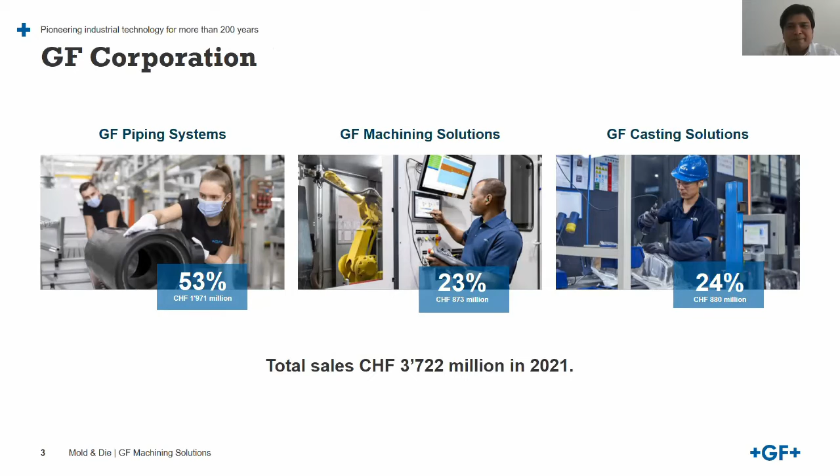More about GF Machining Solutions: currently we are headquartered in Switzerland, in Biel, and employ around 3,000 employees all around the world. Production facilities range across Europe and China, and we have 33 sales companies catering to the needs of individual regions and countries around the world.

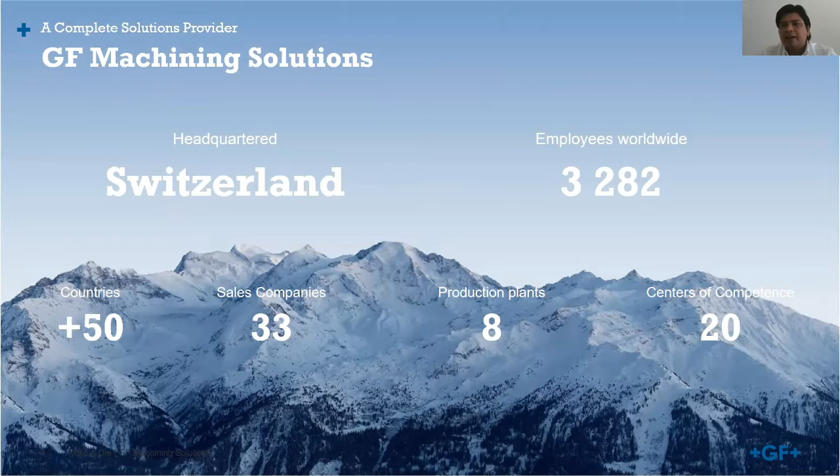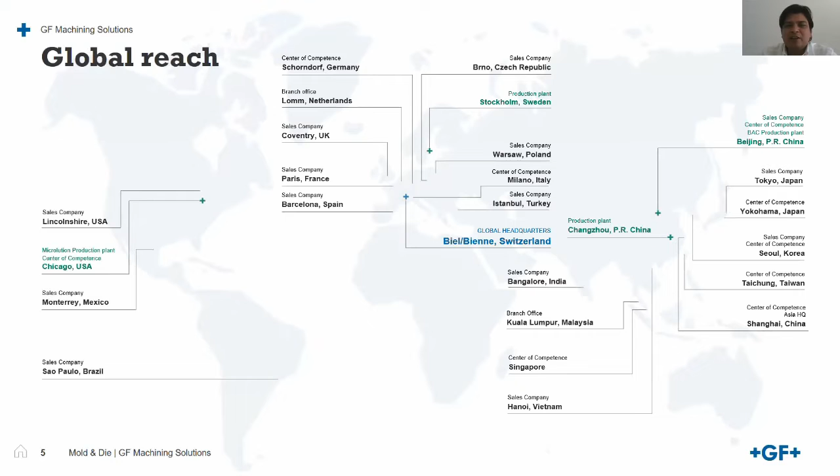If we briefly look at this, these are the competence centers, headquarters, and production areas available all around the world. We care about everyone around the world, mold makers, part manufacturers in many segments, supporting the manufacturing industry. We also have a long list of partnerships with research organizations to help us develop new solutions and innovations, continuously making progress on the machining and machine technology side.

Today, we have a portfolio of around 8 different technologies. Obviously the milling solutions, which include high speed, high performance machines, and also for aerospace, engine plus specialized dedicated machines. Then we have EDM machines, where we have die sinking erosion, then wire EDM, and also drill EDM.

Laser, which is fairly new, is laser ablation, including texturing, structuring, and a different range of laser sources. Additive manufacturing: we have a partnership with 3D Systems to provide metal additive manufacturing solutions to industries at the moment. In micro machining, we have a small unique technology with Microlution, based in Chicago, which is used to create fine holes and small metal machining for various aerospace or electronic industries. Then we have our own spindle technology, the Step-Tec high-speed spindle.

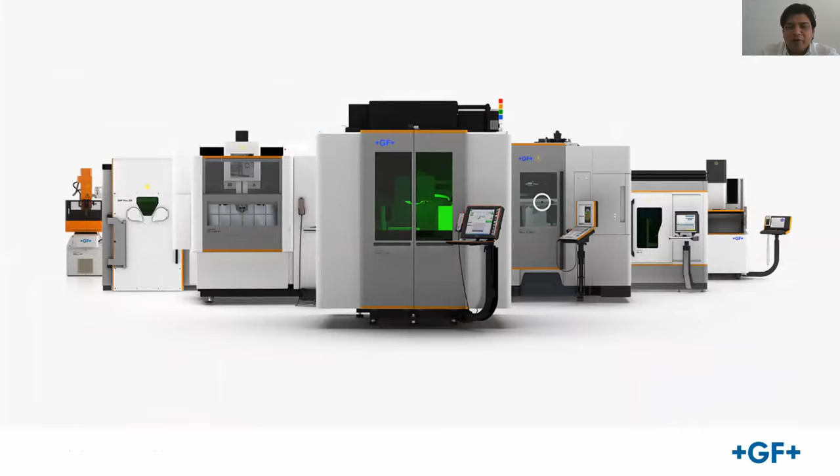So now we come down to discussing the topic of today: how we can support this using our technology. First, a brief look at the unique portfolio of our technology in combination with milling, die sinking, laser, and EDM.

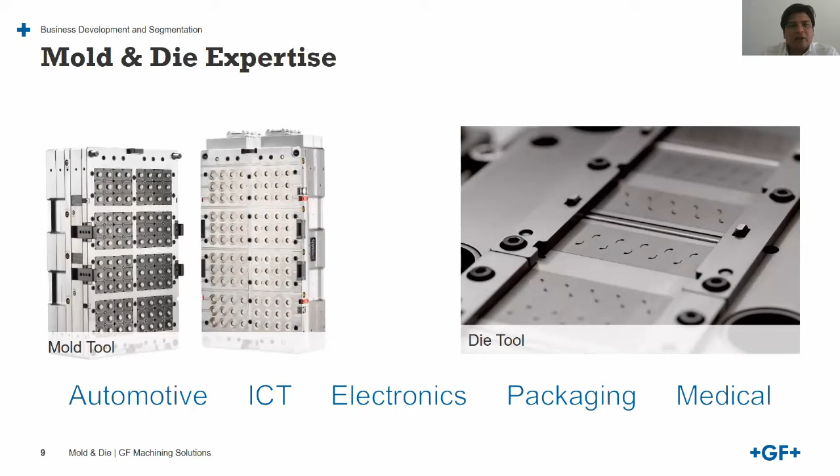This is mainly to increase our expertise in offering solutions for mold and die. Today, our focus is mainly in 5 segments: automotive, ICT, electronics, packaging, and medical mold and die industry, to create plastic components and create efficiency with the die tool in electronics or automotive for EV. So we have a large customer base who use our technologies in the mold and die industry.

So coming to innovation and trends, we started to see how we can explain the impact of the mold and die industry. Today, mainly what we see in the end is OEM consumer products, so we started from there. We have some products which we are offering or working with mold makers and OEM, and what we see in the market. A selection of these products we will briefly go through to understand how they are impacting, and what are the changes in OEM and consumer applications which are important for us as partners in the mold and die industry to understand.

First, this is just a small bottle of plastic. Now usually in a plastic bottle you have a certain amount of plastic used, even in the ones which are non-reusable. So you drink the water and you throw the bottle. It involves PET. This is a new product created by Nestle, which has an aluminum casing, and the internal part, made with the PET mold, is produced using 40% less plastic. So now, by using this product, you already add to the value chain by reducing the amount of plastic you use and you recycle.

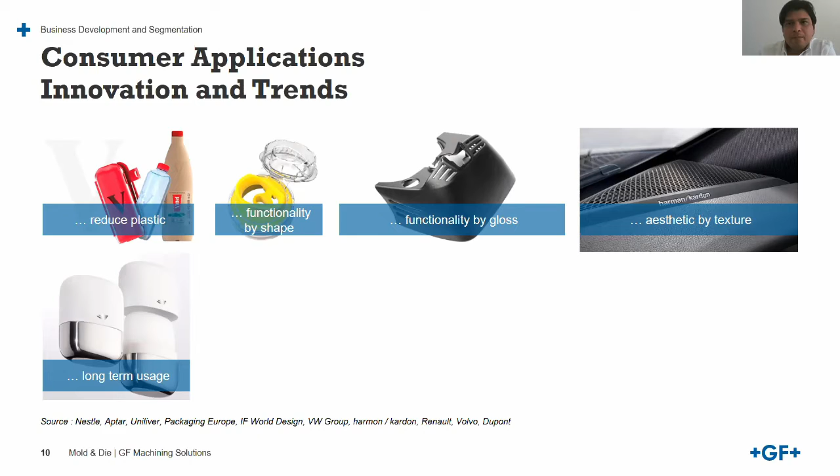Is it okay? I think so. You can move on.

By using a particular plastic which can last for a long term, you improve the product so it can be used in a reusable way for a longer lifetime. This automatically reduces plastic consumption because now you don't have to buy one plastic after another, but you can reuse a harder plastic that lasts longer and use it in a reusable way.

Another example is where we collaborated with the company DuPont. They were testing for chemical packaging and storage. Glass is a good material because it is chemically inert. With DuPont, they developed a particular plastic which has the same likeness in terms of texture and feel to glass, but it is not glass, it is a plastic. This was mainly developed to store chemicals and for the perfume industry.

We developed this mainly with sustainability as the goal, in the sense that the processing chain of glass is not as sustainable. Glass itself is sustainable, but the processing chain is not. So to remove that part from the value cycle of the product, they developed a special plastic which can be reused to replicate the glass-like effect and also hold all the chemicals, which has potential in the wine industry and pharma industry along with the perfume industry.

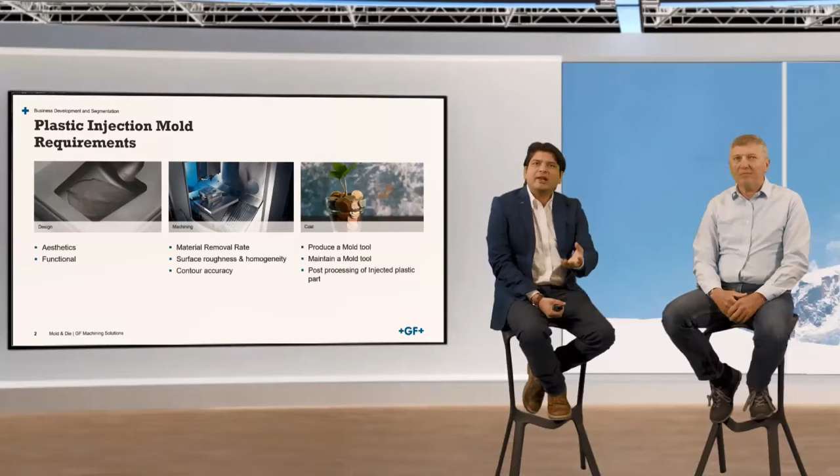As we discussed in the morning, there are sustainability aspects, new plastics to be injected, and new values to be created through the mold and then injecting the plastic. All these trends can be summarized from the mold manufacturing point of view in three pillars, which we are trying to address through our solutions. So today our discussion will focus on 5-axis milling and laser technology, both 5-axis.

Before we move forward, let's watch a short video introducing our product, a 5-axis laser texturing machine.

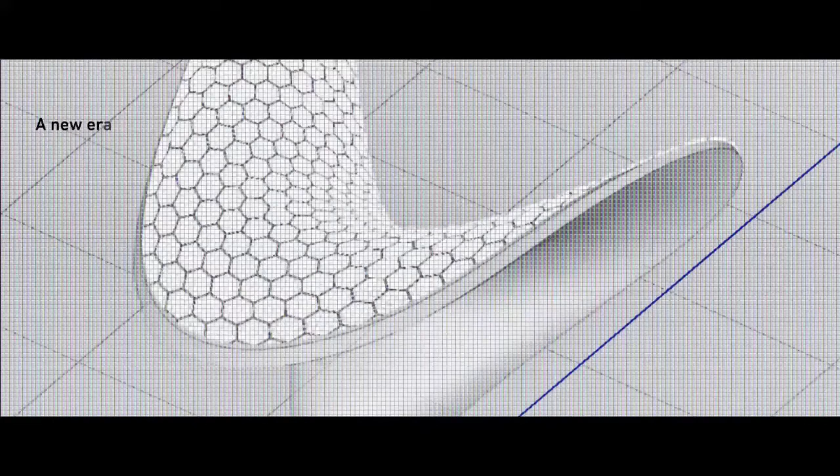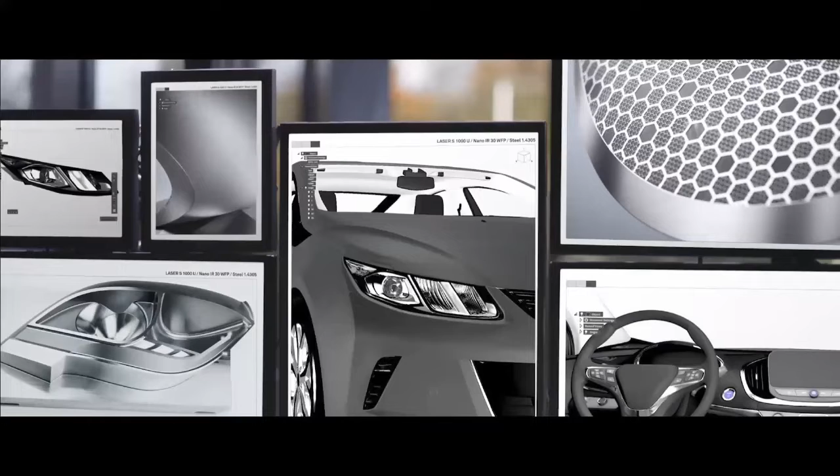Every step, every breath, every moment matters. Every second counts in the search for inspiration to capture the perfect form. We're with you, embarking on a new era in manufacturing. With our Laser S manufacturing solution, the versatile machining system enables new ways of working to answer the toughest texturing challenges. With a high-speed 3D scanning system and wider marking field, you can create even more.

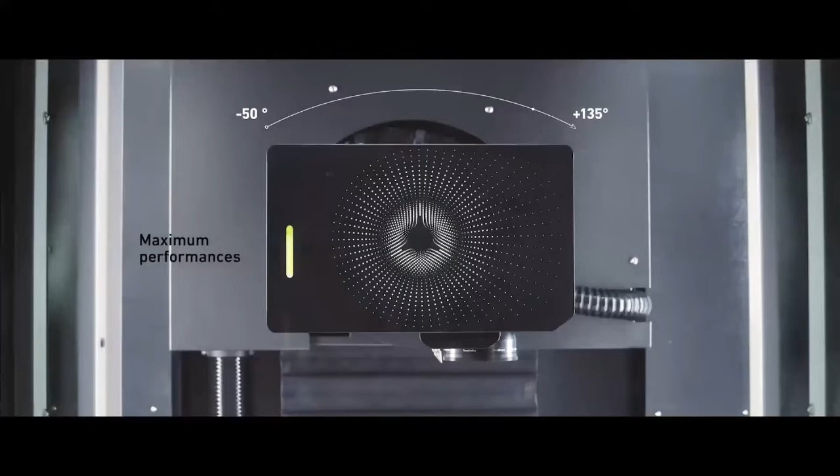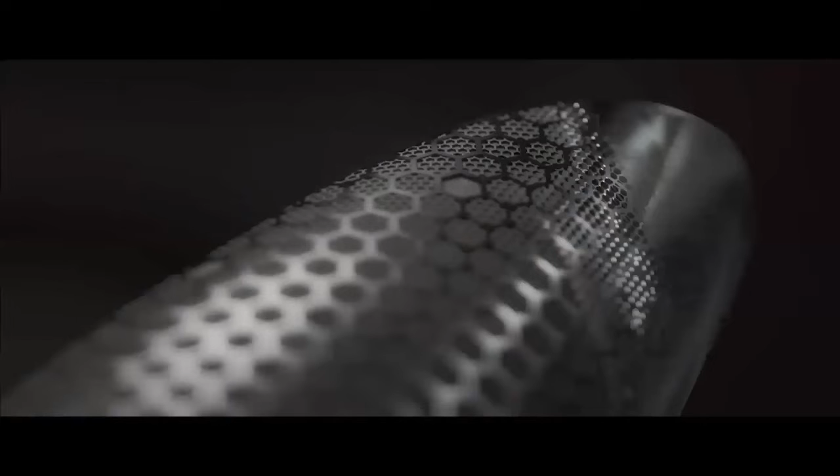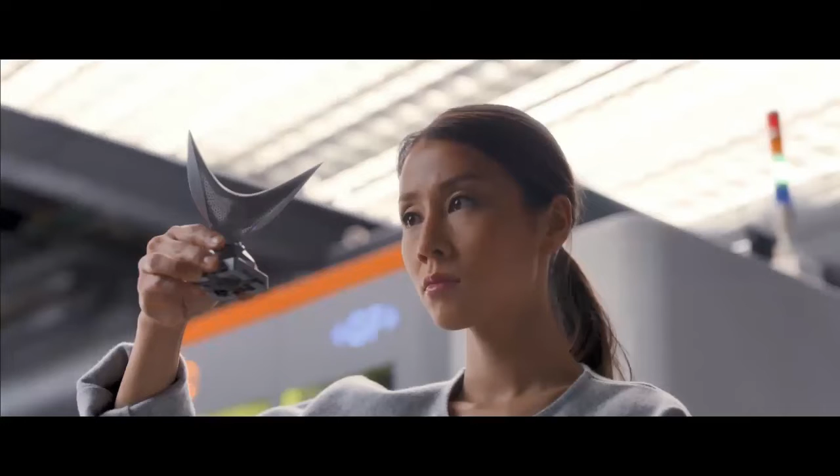SmartPatch technology optimizes your work for maximum performance. The soul of the machine, a unique laser head to achieve immense complexity. Moving fast to a simplified manufacturing process. You're always connected. And with expertise available from our academy, you'll accomplish even the most challenging projects, enabling the execution of the most complex parts while the finest grains are achieved, giving you the power to turn inspiration into perfectly designed, flawlessly produced reality. Laser S. Innovative texturing. Accelerated productivity.

Okay, so great introduction to the Laser S series.

How could a 5-axis laser technology machine be used to address some of the challenges mold makers are facing today? Basically every part able to be milled in 5-axis, where we can access with the laser beam - but the laser beam is smaller in size and longer in length compared to a milling tool.

Usually every kind of part you are able to mill, we can engrave or texture. This means we are addressing complex 3D cavities for sure. Also regarding design itself, the scheme of the part could be whatever you want - it comes from the design studio, the product designers with ideas, and then we try to apply it on the mold in negative to get the final piece.

The very important point in mold requirement is especially repeatability, for different molds made in different parts of the world, or several cavities made into a multi-cavity mold. And then process simplification - this is every time, every visit we have with customers, a deep request to cut down the cost and to simplify the process.

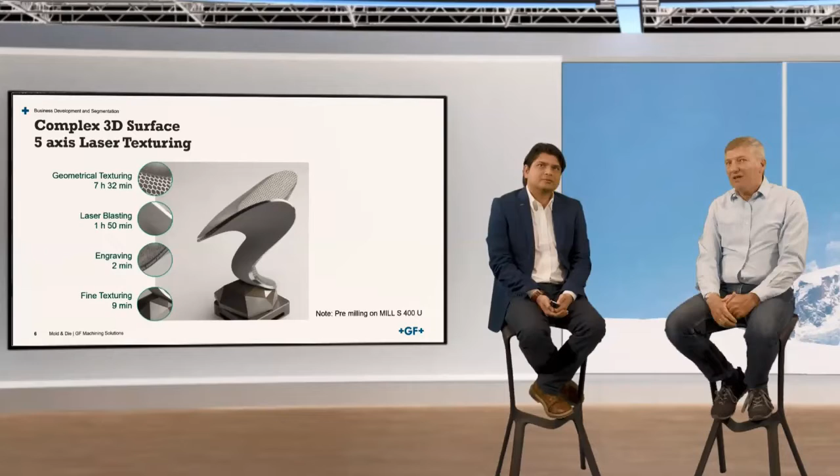On that part we applied 4 different types of texture: the honeycomb you have seen before; we also developed a specific strategy of laser blasting to do a kind of sandblasting, to replace sandblasting, but also to do some EDM VDI replication; engraving, for sure, on the border of this shape there is a sentence written; and on the bottom of this texture there are 2 materials - the wings are made of aluminum, and the pedestal is made of steel. We also applied some very fine texture - this is a brush pattern texture.

So as I understand, we are able to do all this in a single setup on the same machine. Absolutely, absolutely - and also moving from one machine to another through automation or not, through the System 3R tooling. So if I have one machine, I am able to do a lot of things, a lot of textures, and address most of my mold making and surface preparation requirements through this technology.

Absolutely. Most of the requests from mold making are not only texturing the surface - there are also some grooves to make from time to time, or some logos for the brand, or to engrave the part number or cavity number. All these things could be done on the same machine with the same laser and with the same setup.

Okay, so this is good. Let's see what else our laser machine can do. It looks promising for now.

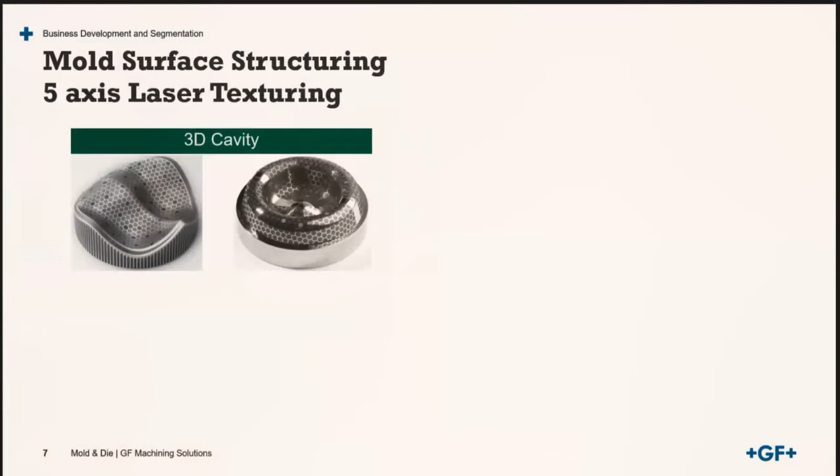Yeah, but still, we can see there the 3D cavities - all of them have been done either by turning or by high-speed milling here, and we need the shape of the part done. The laser will not remove a very high volume of material - this is not the topic, and this is not the performance of the laser. We are talking about the skin of the surface. So the good thing is you still need a milling machine along with the laser machine - to a mold maker, for sure, without a milling machine it would be a bit tough.

One more thing I have in mind - some customers, when they see this part, ask about stitching lines, because they have seen these kinds of issues when doing texturing with etching or other technologies. First of all, we have been developing this software for laser texturing 5-axis since 2000, 22 years ago, and with continuous improvement we are releasing at least 1 to 2 improvements of the laser with new functionalities on the software every year.

And then we are managing these patch lines through the strategies, especially the one you see on that screen with the honeycomb shape.

We use this Smarpatch texturing to cut down the patch, or the design, when it's not necessary. And this is patented - our own patented technology. Smarpatch is the name.

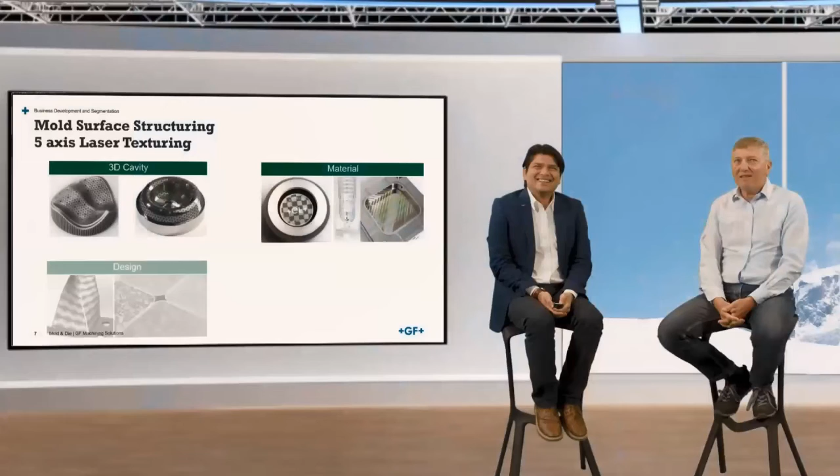Design-wise, I would say it's limitless possibility, because everything we can design, we try, and we've developed the tool to apply that on a 3D model. Could be for aesthetical purposes or for functional ones. We are really well introduced in automotive lighting parts, and this is not aesthetic - or it could be aesthetic, but it's also functional for diffraction of the light, especially.

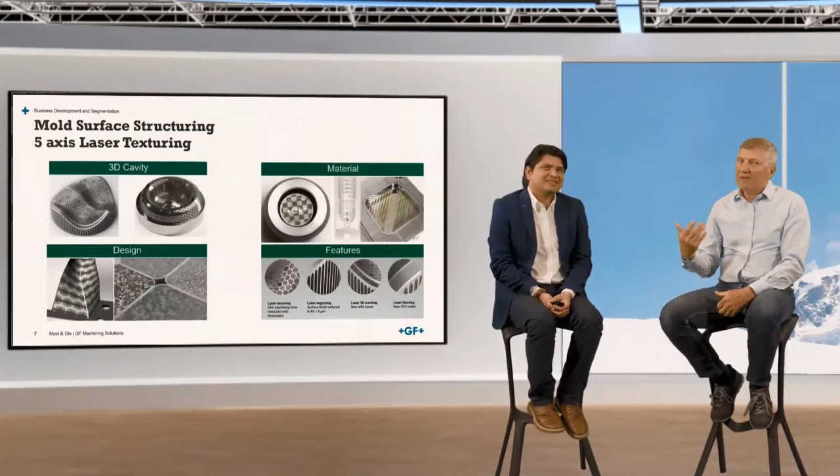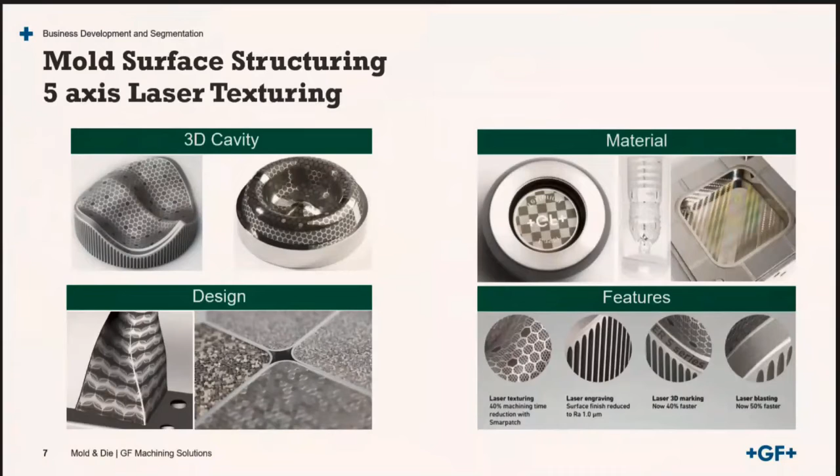So what about the features? We see a lot of things that can be done. Typically on the software delivered with the machine, we do laser texturing - meaning texture the surface, as we've seen with the honeycomb. We can also do laser blasting, which is a specific texture. We can do laser engraving to do grooves, like you see on the second bubble, but also light engraving or marking, and fine texture. Everything is a combination of texture coming from a bitmap file, from Photoshop for example, combined with the surface of the mold or the part.

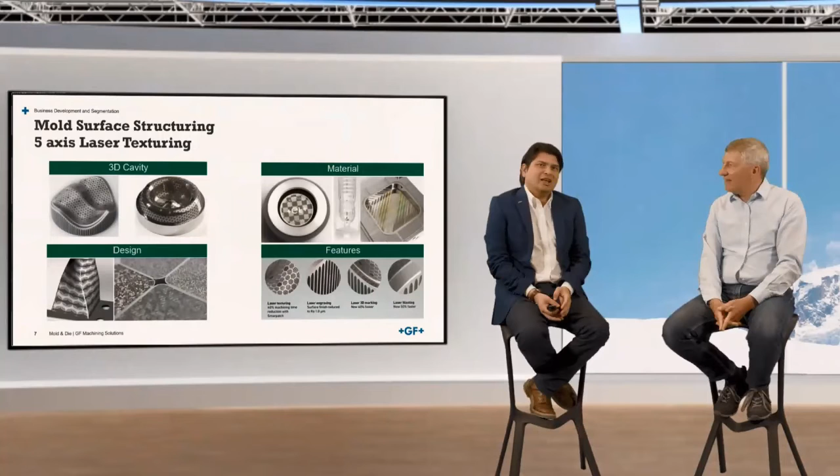Before we move forward, just one more question: if I have a texture, I can do this with this laser machine, but I can also do it with other laser machines, from laser S to laser P to femto, or I can do the same texture with the next generation machine down the line after 5 years.

We are developing the strategies for the new development we have done. If we compare laser P, which is a 2-axis scanner, with laser S, which is a 3-axis scanner, both will do the job, but quality-wise and machining time-wise there will be a big difference, depending on the shape and the texture. Time saving of 2 to 3 times using laser S compared to laser P. But not every part or shape needs a laser S - if it's flat, you don't need it. Then for the femto, this is different - mainly for micro engraving, micro machining, more requested in mold making, but more for lighting and packaging, because we can do very nice texture without burrs, without very sharp textures. This is one of the purposes.

Yes, Bob, I think you had some comment, but you are on mute. I think it's probably better we just carry on straight through. We carry on? Yeah, okay good. So if you have a break already, bring your coffee back.

Okay, so we got a very nice introduction on laser. Now we will move forward to 3 simple applications: PET blow mold, rigid plastic injection mold, and a forming mold.

We specifically choose 3 applications which you can see around the house, and we are trying to speak to mold makers and show the value we can add with our solution, even on simple molds. If we can add value here, obviously if you are doing a complex automotive lighting mold, there will be a definite 3-5 times value with the same solution.

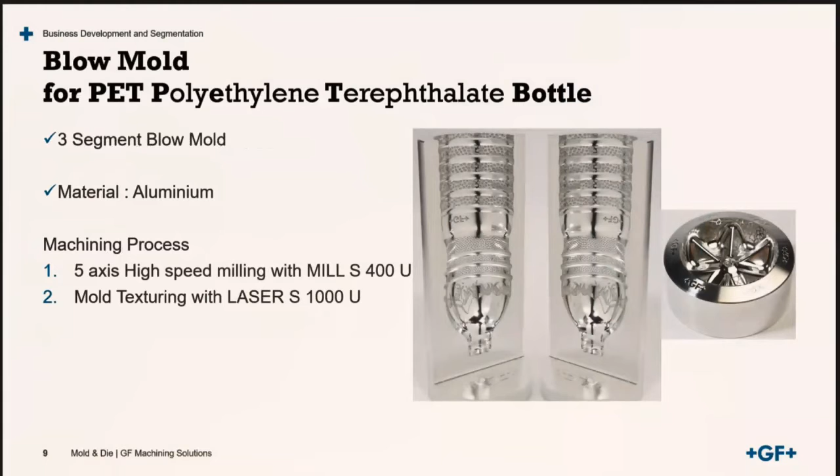Absolutely. So to start with, let's start with the first application, which is a PET blow mold. As we know, it's a 3-segment mold, usually made in aluminium. We apply our process of pre-milling and machining the cavity in a 5-axis milling machine with the mill S400U, and then we use the milled part with our laser machine to see how we can address all the texturing and engraving requirements on this mold.

So to begin with, we have the first kind of application description, I would say.

We did the blow mold in 5-axis milling, as you can see here. We arrived at a machining time of 6 hours 32 minutes for the larger part, with a surface finish of RA 0.03 microns. Wow, so it's already close to polished surface. That means in milling we are able to achieve polish-level surface to avoid manual polishing, which is especially in mold making usually a bottleneck. Yes, wow. So ideally, in this case, we can save up to 8 hours of polishing time.

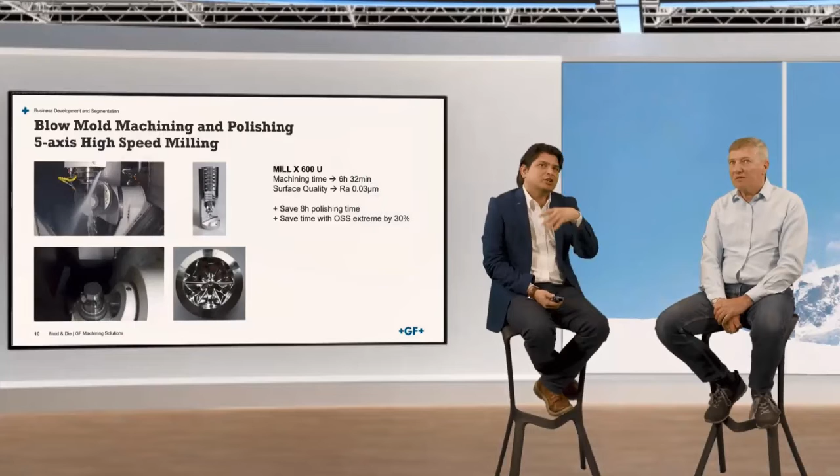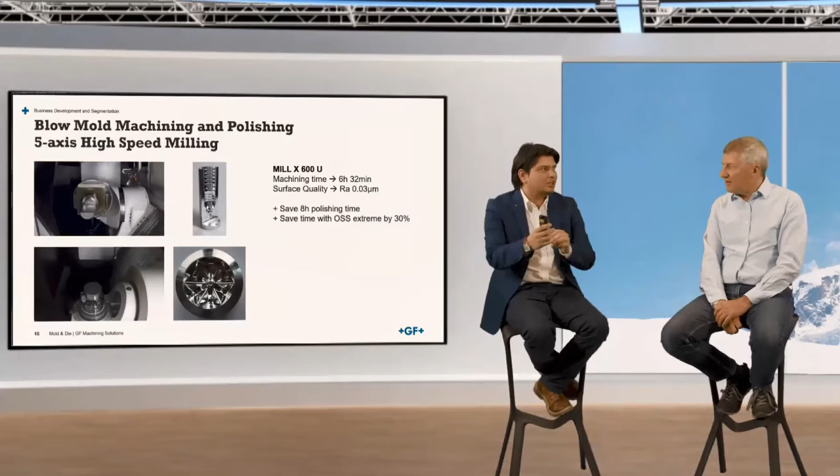And we use the OSS Extreme, which is basically an operator support system where you can choose to prioritize surface quality, accuracy, cost, or time. These are smart parameters in the software system. We applied it and we achieved this result.

We also did the bottom part in 1 hour and 11 minutes, again matching the same surface quality of 0.03 microns. Here we save an additional 3 hours of polishing, and we applied the same OSS Extreme parameters, which are available on all our high-speed machining.

And here every part has been mounted on System 3R pallets to be able to transfer them to the laser. It's a simple clamping system, our own System 3R. It can be used once you have done work on other GF machines, or other machines, whichever the customer has in their shop.

After this, we applied the laser technology. Yeah, there were a few different parts for sure. This is a 3-segment mold. The right side and left side are not exactly the same, but they match together. This is very important, to have a continuum of the texture around this 360 cylinder. There were some features, different designs with logos, like the GF logo we put, and we can see our mountains behind it.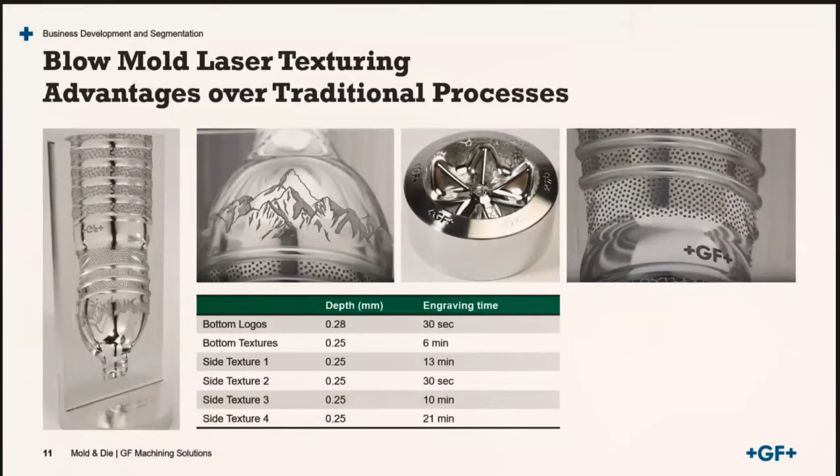And this is quite deep texture. You can see here it's minimum 0.25 millimeters, but could go down to 0.5. Same here, this is quite fast. Here you can see the numbers. This is very interesting to see.

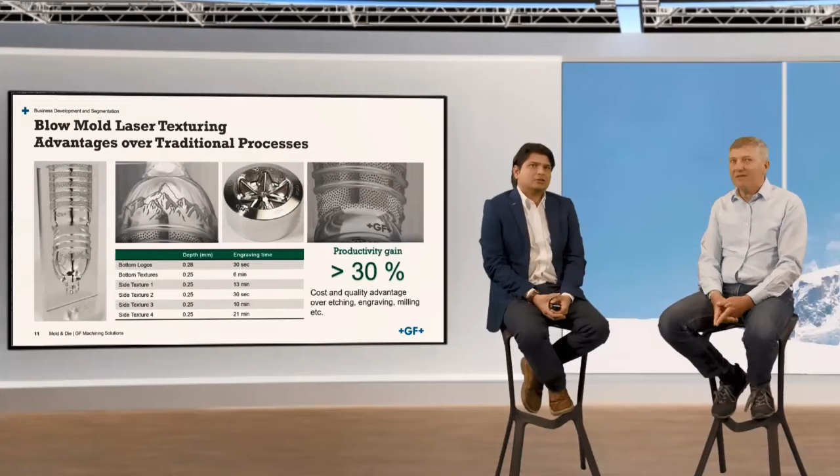And we were, for sure, compared to chemical etching, which was the way to make these parts before, really productive. And especially, this isn't mentioned much here, but this is fully automated, 24/7, because there is high demand for bottling systems. Also, mastering etching on aluminum is not easy, it's going too fast. I can imagine, because aluminum is a little softer compared to steel, so you need more control over the parameters and how you machine.

Absolutely. And don't forget, one of the longest steps for etching is to protect the part before doing etching. The etching process itself is very fast, some seconds or minutes. But to prepare and protect the mold could take hours or more.

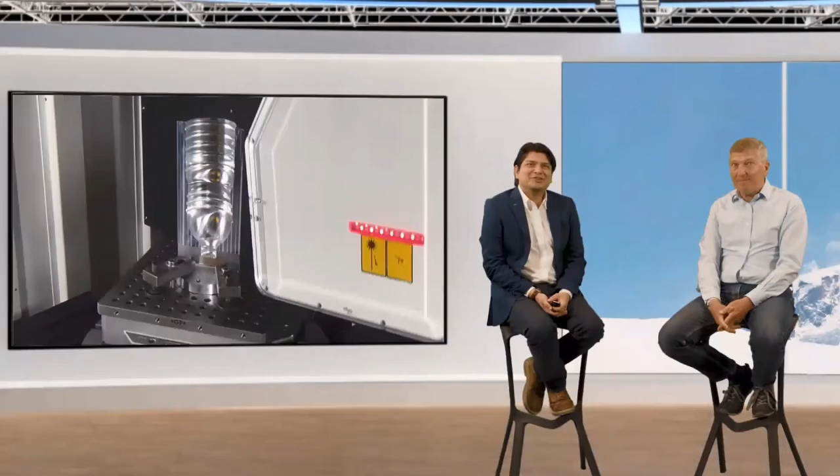So I guess we have a small video to show the laser functioning and preparing the texture and all the elements we saw before in a 5-axis setup. As you mentioned before, here we are working batch by batch. We move 5 axes and then apply the texture with the scanner. This is positioning - it's 5-axis positioning plus laser engraving on the surface.

But we can see here, this is an automated production with these System 3R pallets, coming from the right or the left of the machine depending on the customer's setup. This is important to mention.

One thing not shown here: from one machine to another, the part has to be clean, meaning removing the lubricant, chips, and so on, because this will affect the quality of the product. And we can integrate the cleaning system into our automation. Absolutely, the washing machine we add could also be done with automation.

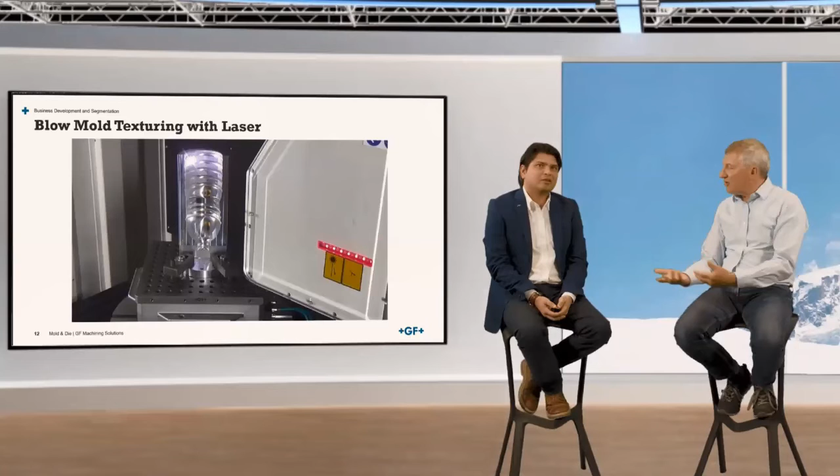This is quite common. The same clamping we saw in this video can be reused and started with milling, goes to the washing, ends up in the laser machine, and eventually then back to a CMM for control, for example.

That's a good example, and like we said, we have a lot of advantages preparing different elements on the blow mold, achieving better productivity, cost, and quality repeatability against traditional or conventional processes.

On top of that, as soon as it is a 3D representation, we can do real 3D rendering to see the product before, in virtual, before texturing, to have a conversation with the product designer to adjust final details before engraving.

To make sure that the textures are aligning and the product looks how they want it to look, fulfilling the requirement of the product design.

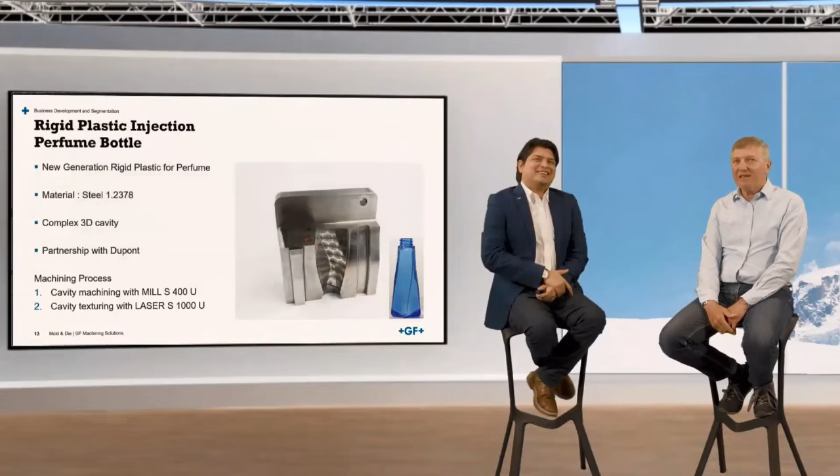Let's go to the next example, a very interesting one. This was done with the collaboration of our neighbor in Geneva, Dupont de Nemours, who are really present in packaging. This was a specific tough plastic to inject, done a couple of years ago, maybe 5 or 6 years.

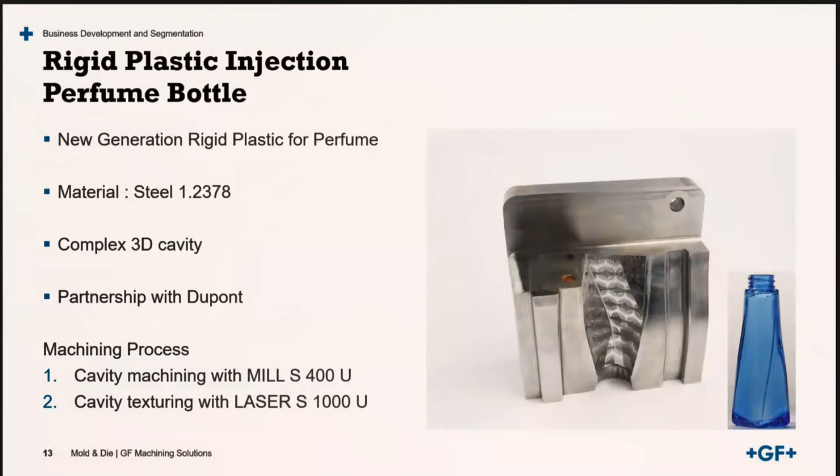Just to explain this application or the mold: with Dupont, we established a small partnership. They were trying to test chemically resistive plastic which can be used to replace glass in the perfume industry. Why? Because glass is more recyclable, but manufacturing glass creates a lot of gas which is environmentally harmful. If you can replicate the glass look with plastic instead, this improves the overall environmental impact of your production chain.

So this was the motivation, and this is the plastic for which we created the mold, and they applied it using their own injection molding process. Also design-wise, here the replication in plastic is far better compared to glass molding.

In this process, as you will see further, the cavity is quite complex. So we use a combination of our 5-axis milling and 5-axis laser solution to first create the cavity and then apply the texture and branding features to get the final plastic part. The material we use is 1.2378, basically mold tool steel.

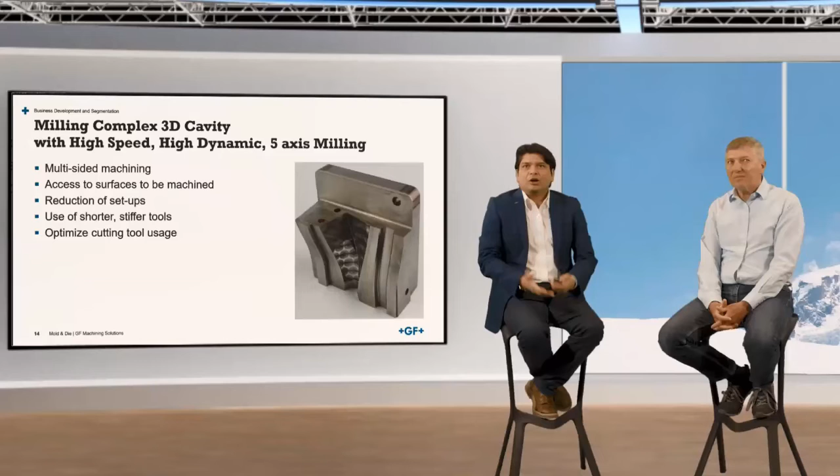But what if this cavity was also tried in 3-axis, or if there are cavities which can be done in both, what could be the advantage of 5-axis? To briefly explain, we have a description from our application engineers: in 3-axis you have a tool, and to get a very good surface finish you need to use a ball nose tool.

You have a setup in 3-axis and a setup in 5-axis. The way you approach the part through your tooling is the difference. You want to achieve good surface finish, but the problem is that in a 3-axis setup, the tool which brings the best surface finish will have a center velocity at the tool tip which is zero. So basically you are scrubbing the surface, not cutting it.

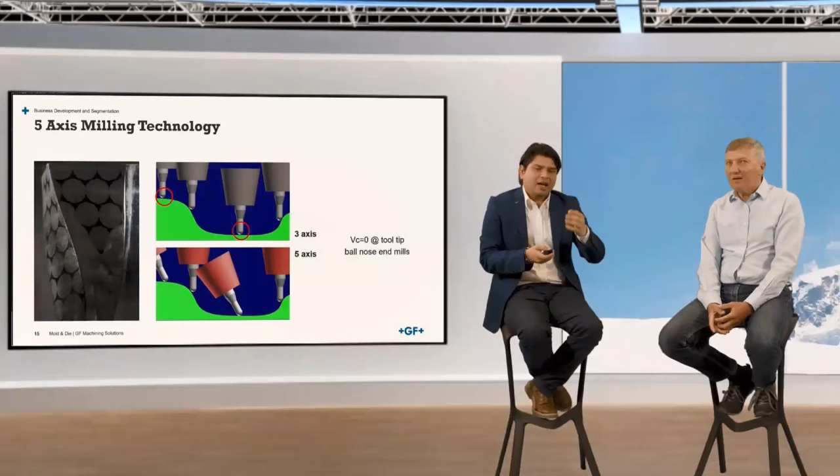With 5-axis, you can have the impact on the tool at the right angle, which will improve your machining time because now you are cutting. It also allows you to control yourself on the 3D complex cavity, so you get a better surface finish and faster machining. The impact of both is that you save time, because in the first case you are losing time. You get a better tool life for a longer time, and a good surface finish can be achieved with 5-axis.

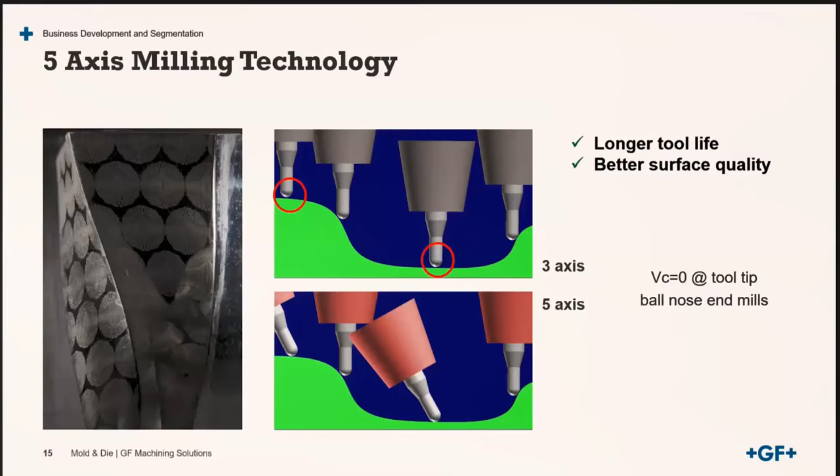Having this good surface finish at the very end also saves you time on polishing. Because if you have something scratched or damaged, you have to put much more effort into polishing, eventually causing deformation of the shape, while that doesn't happen with 5-axis in this case.

So it's a cascading effect. Once you buy a 5-axis, you don't want to run a 3-axis anymore. So once we prepare the 5-axis milling of the cavity of this mold, we again go back to the laser technology to prepare in detail the textures on this mold cavity.

What has been done here, you can see this is a repetition of the same pattern over the surface with some limitation in terms of connection. This is not a two-side cavity. It's a 4-side cavity because there is the neck ring, the bottom, and the two half of the cavity itself.

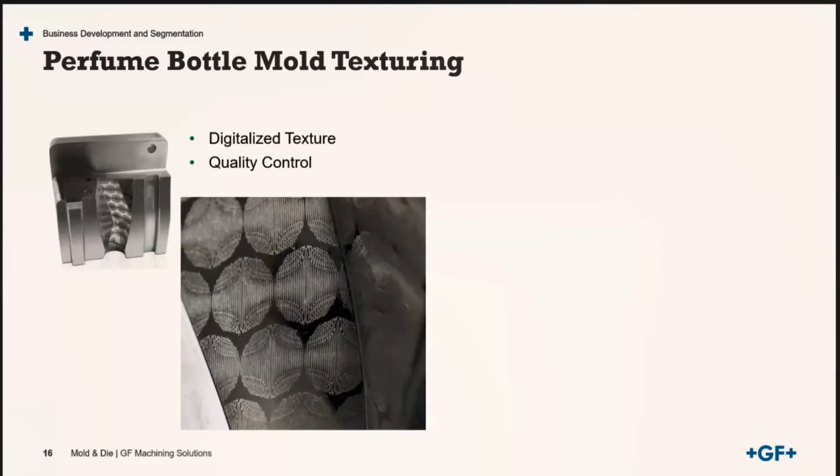We took the feature in the center, which is the design. Then we moved to Photoshop or GIMP in this case, which is an open source tool, to replicate this pattern over a surface. And then we wrapped this texture on the surface to improve it, and each single feature has been machined in one single position.

And then we moved to avoid what you mentioned before, the patch line. There is no patch line because these are isolated features in this case. And it was required by the design.

So we have a lot of these textures, but in fact the texture is just one, and we are replicating it with the laser machine. This has been replicated into a bitmap made in Photoshop, and then we do a UV mapping of the texture over the surface.

So our customers or clients can use even a small thing, somewhere they find inspiration to create something - this is the case - and then it can be replicated over the whole mold surface or wherever they wish. This is selective, by the way.

Okay, great, and we gain some productivity. This is compared to laser P in this case, because we can use a larger - as shown during the video before - we are using a larger scanning field, and also this is a smooth slope, meaning we can cover a larger area of machining using laser S technology.

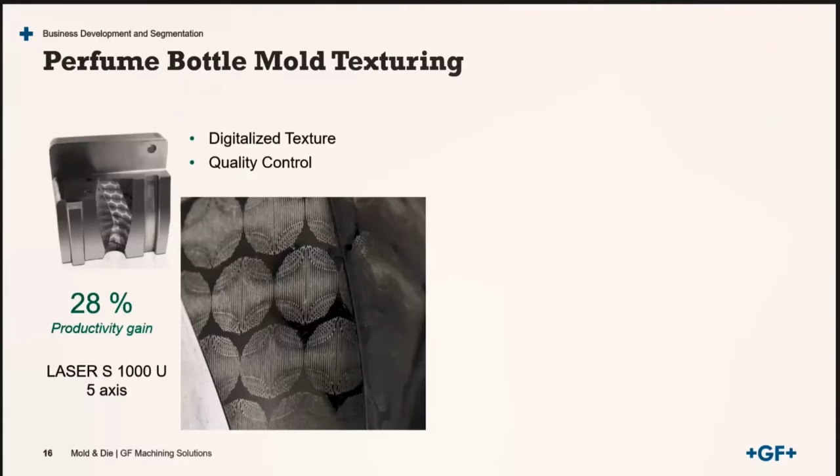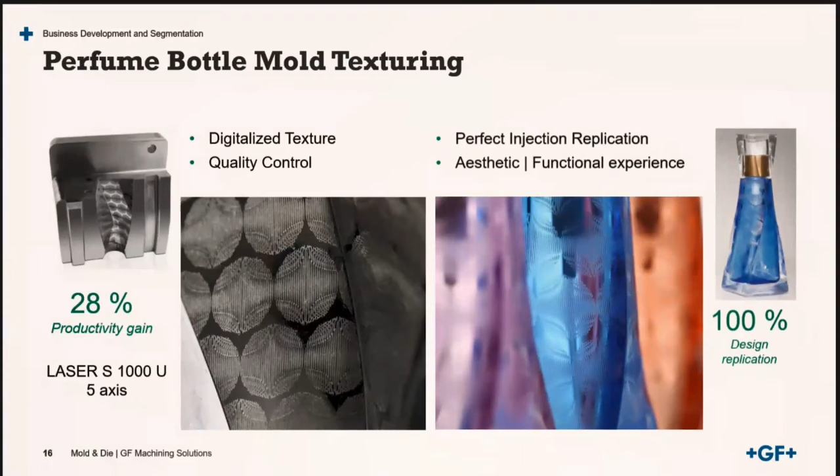So this is what we achieve on the plastic. So guys, just remember this slide: with a laser machine, you can have a digital texture, whatever you want. You can replicate it to have proper quality control over all of your surface, which then impacts what you achieve on the plastic part, in great detail.

So you can have a full replication. You can have it just for look and feel aesthetics, or you can have the functional also. It can be, for example, for demolding release functionality for the core - it's not for the cavities, but for the core. This is also another topic, but we will not cover this point today.

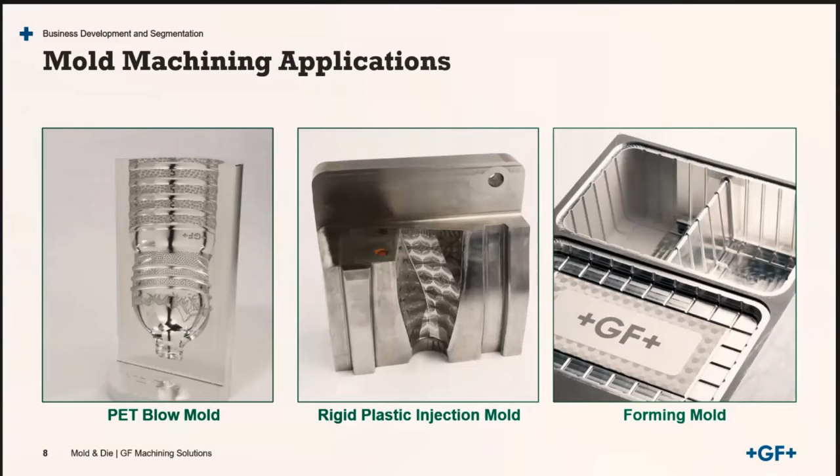We move forward. Okay, so we go to the last part of the recorded session now, and then we close with a small customer test for today. We move forward, just a small kind of summary.

Of the mold making conventional surface preparation technologies, like etching or die sinking, and what we are able to do with laser texturing, and how it can improve the existing and current processes, and how mold makers can use our laser technology to integrate it into their own production areas.

Obviously, from the cost point of view, die sinking uses electrodes, and there is a long process of preparing the electrodes, milling, graphite, so there is a lot of cost involved in equipment and process. If we compare it to the chemical etching process, it has a manual cost, but now more and more we see it has an environmental cost.

Just before, he told me that in China it's already in the pipeline - in some provinces there are taxes to be able to use such capability of etching.

Whereas with our laser technology, in terms of cost, you have no tooling cost, nowhere. The process is automated - you buy a laser, you can run a laser, and for sure you can put several parts on the pallet and so on. There are different levels of automation. So obviously, from the cost point of view, it has certain advantages over most, if not all, of the technologies. We can run 24/7 without fear, because it's repeatable.

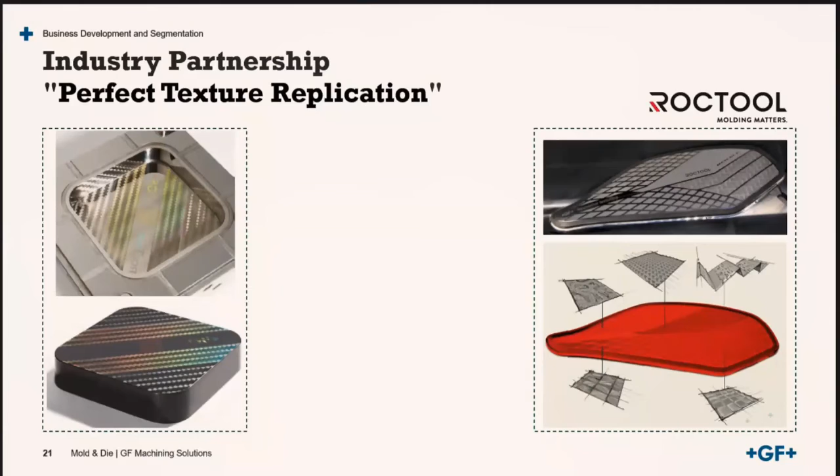So just on this point, obviously we can make the molds, but it's not still enough - you need plastic injection also. You need to have the expertise or proper control over the injection process, because you might have the best mold, but if you don't have control over injection, you will not get the best part.

That's why in our company we are working also with Roctool, which is an injection molding technology supplier. We work with them to create applications and solutions in different industries, and follow the new trends to create molds and plastic parts to demonstrate the possibilities and market requirements.

We have two examples here. On the left-hand side, this cavity - you cannot see very clearly, but this is typically a carbon fiber texture, a very fine texture, few microns deep. The goal is to be able to replicate this without using paint, to have a very nice, detailed surface without paint. To replicate such a fine texture, you need a way of making injection with very high reproducibility - that's the purpose.

On the right-hand side, this is a lighting rear lamp mold. Here it's different - there were multiple injection gates, and to avoid welding lines and have a very smooth, homogeneous surface, we used this Roctool technology to remove the welding lines and improve the mechanical properties of the parts.

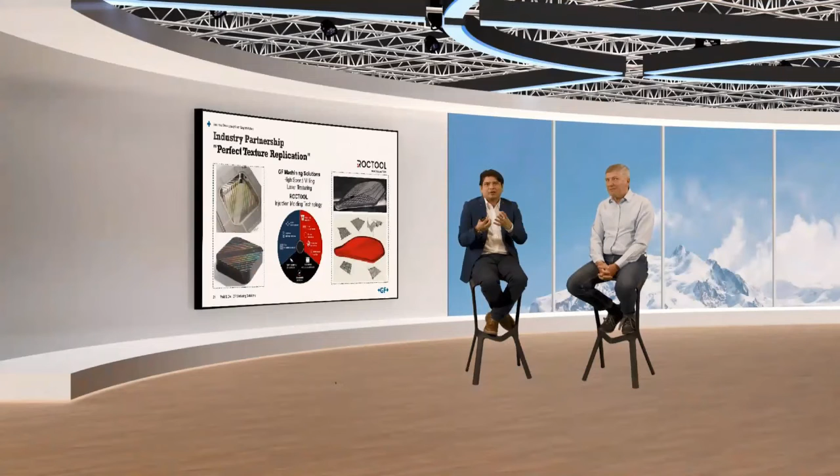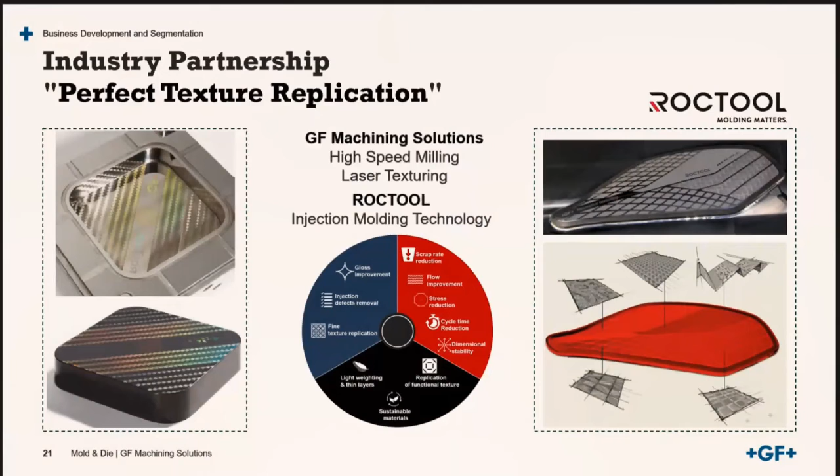And to not add waste, but recycle what we do. For customers interested in using recyclable plastic, the plastic is coming from different processes and different lifespans, so it may have impurities already inside, or a breakage of bonds. So when you want to re-inject it, you have to apply high temperature so that you harmonize all the bonds in the plastic and liquefy it in a normalized manner. Then you can inject, and you get a part which looks like it's coming from a single plastic, not parts of different plastics.

So very interesting technology, we are working with Roctool a lot. We show it at different events, and also when customers visit our plants, the applications we are developing. We combined our strengths to work on sustainability, because on the laser side we don't use, I would say, wasted lubricant, just dust. On the other side, we try, with the help of Roctool, to remove the paint on the part, which is costly and also not the most environmentally sustainable. This is the reason why we worked to improve this way.

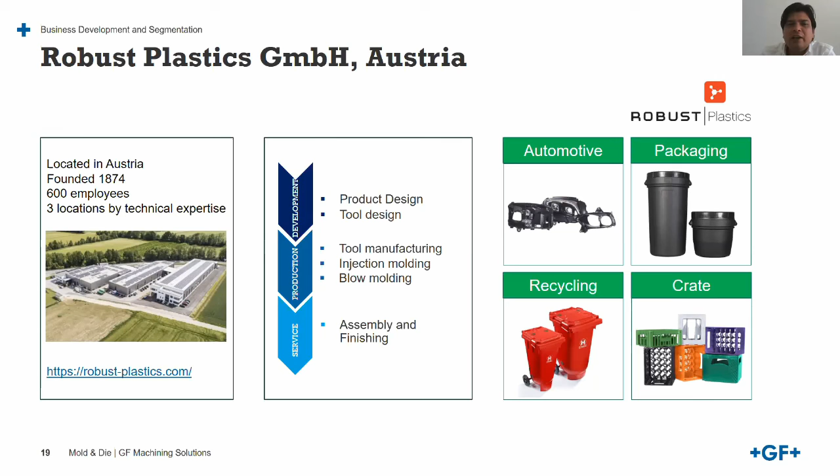It's a medium-sized company located in Austria, and they create products for automotive, packaging, recycling, and also crates for handling beers, bottles, and transportation. They do the product design, tooling design, manufacturing, and assembling, all in-house. Here's a small video of their factory.

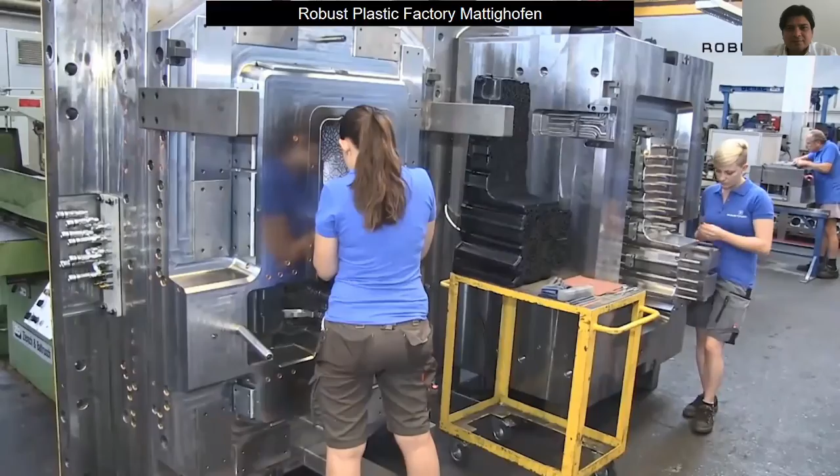So let's go to what was the discussion. This is an interesting point because usually the customer arrives and says, okay, we would like some capacity in producing electrodes or molds, but we would like to understand, or we discuss more with the customer, what was the expected value and what was the real business goal.

And in fact, once we got into discussion, we arrived with the customer at the understanding that the real value and business goal was not just the production capability, but also the benefit to produce in Austria, to be able to win local government contracts to produce parts for municipalities. On arrival at this, we proposed a solution which was accepted.

The solution consists of producing graphite electrodes and cavities. It includes the CMM machine, storage for cavity, steel, and electrode parts, and positioning and part handling robots, all linked with the System 3R workshop manager.

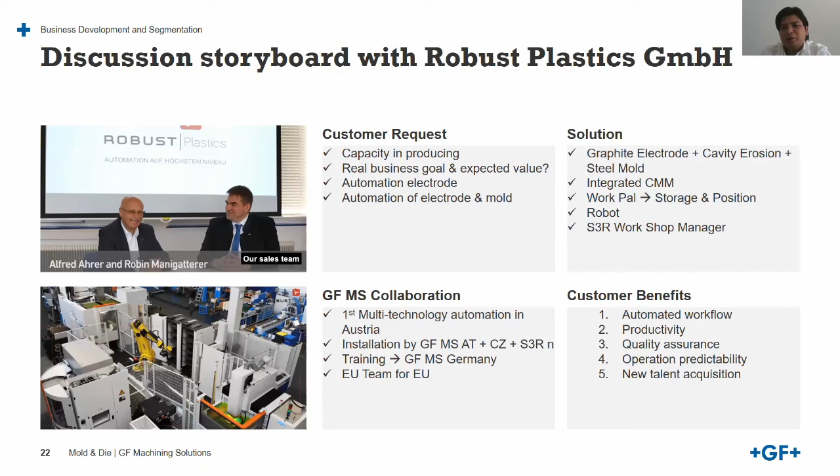Finally, just the solution video from the customer. And I got a message that our previous partner at GF, Christian Pianchenko, who is in the audience, would like to mention that he was part of creating this testimonial when he was at GF.

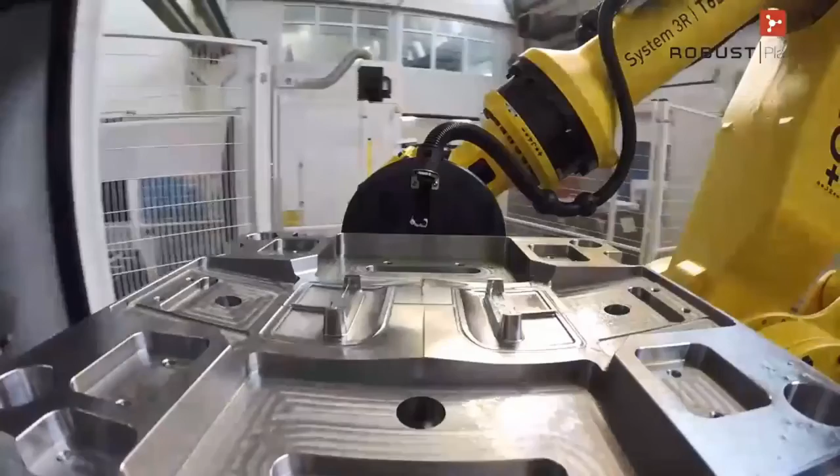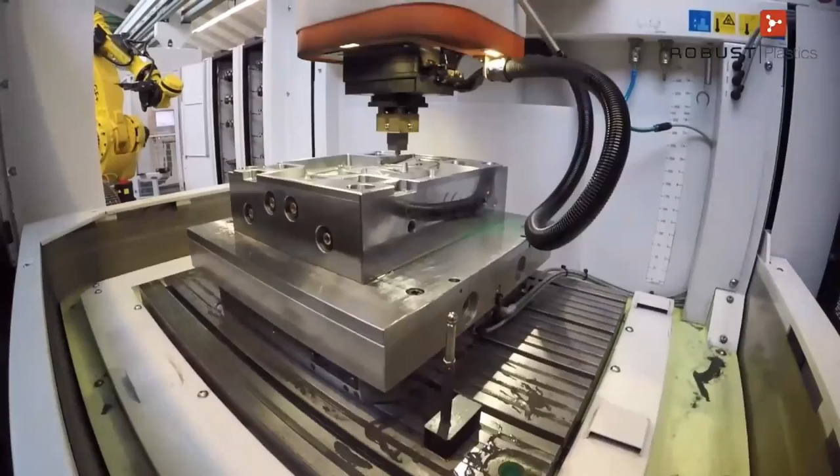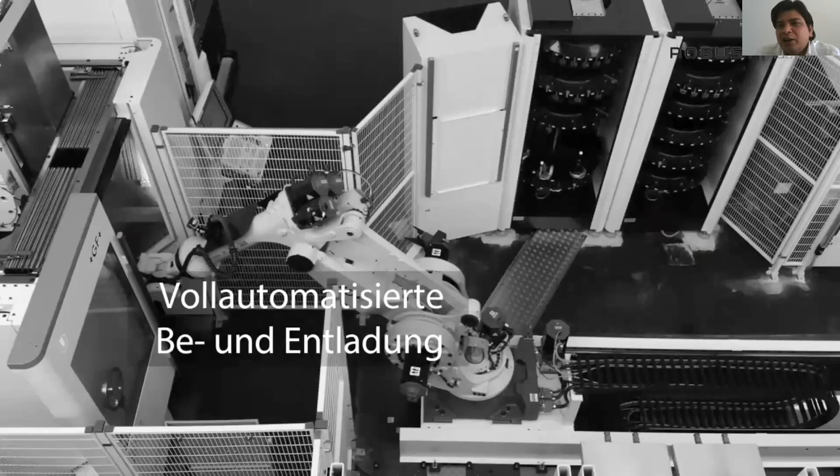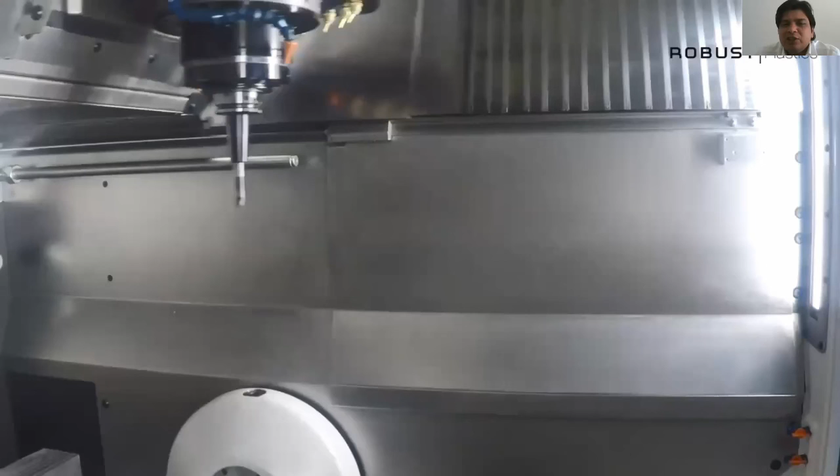I would like to add one comment. The solution was important for the customer, not only to produce parts at the same rate in Austria instead of Hungary, where they had a plant, but also to attract new employees, mainly younger generation. They were attracted to move to a company nearby that was not working mostly with hand but on computers. In this way, they were able to attract some automation engineers and keep them in house.

The new generation wants to do things in a new way, so we have to provide for them to keep them in our industry.